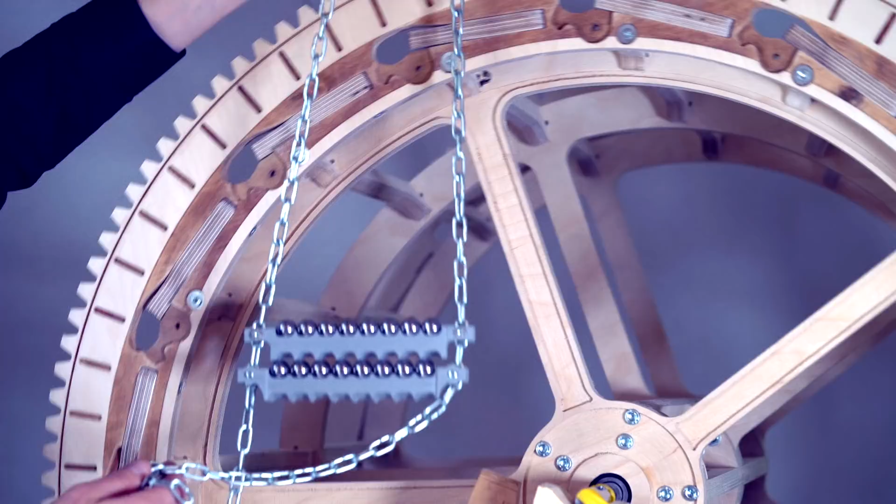This 3D printer arrived to me 48 hours ago, and I've been trying it out since then as a true beginner. Probably if you have any 3D printing experience, what you saw in the montage was material for a lot of facepalm moments, but I'm learning fast already.

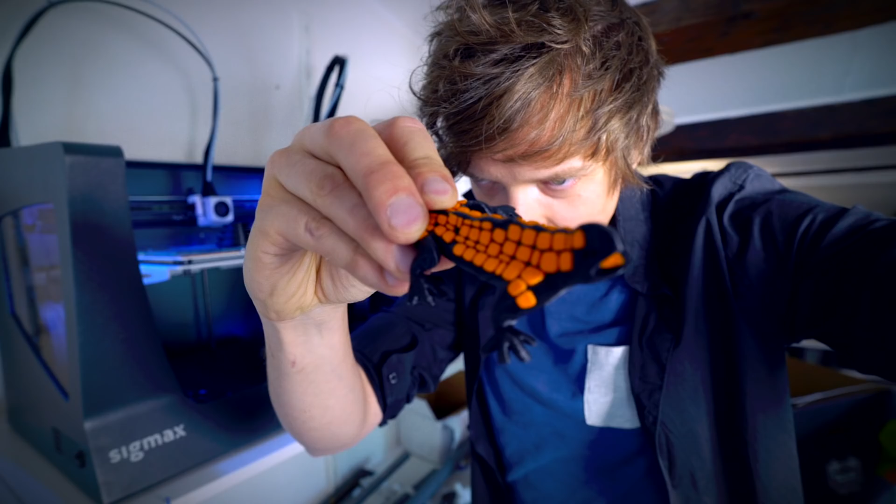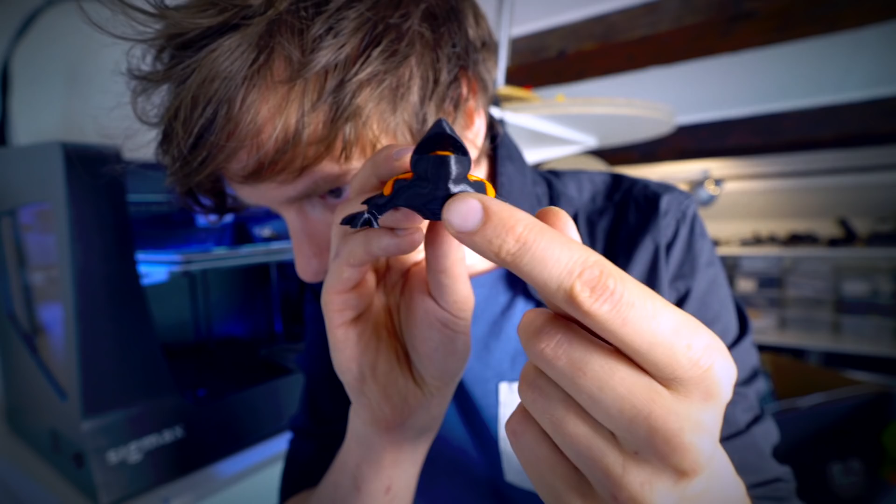It's a BCN3D Sigmax dual extruder 3D printer, which means it has two printing heads, so you can use two types of materials at the same time. Here you can see they used orange and black to print the tongue and the protection plates on its back. You can also see they printed this almost 45-degree angle without any support underneath. That's pretty neat.

So this print quality looks really good. I think a big part of getting good prints is the calibration. I did not do any calibration, and I did not check for the correct temperatures of my materials and stuff, because I didn't have time.

So this is a 0.4 nozzle that I'm going to install. What's cool is that you can have a smaller nozzle on one print head and a bigger one on the other. So then you can use the bigger one to print support structure and the smaller one to print the actual print. But if you design good, you don't need support structure.

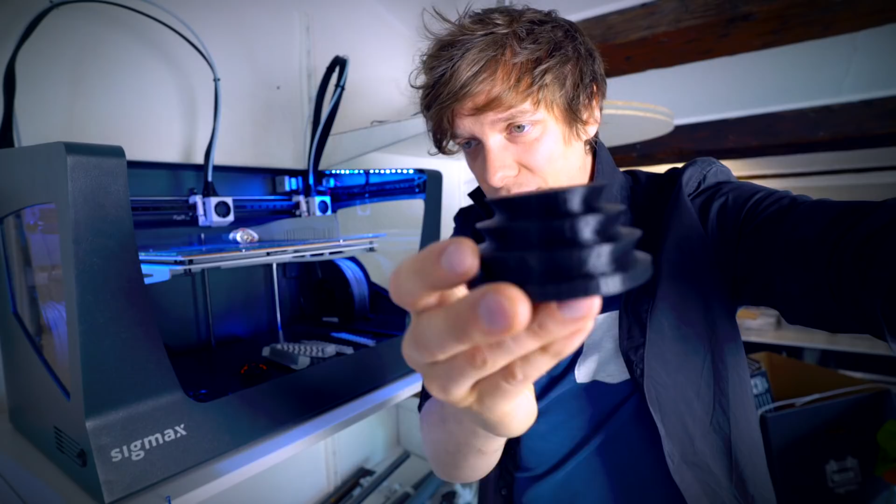For example, when Marius was here, we did this pulley, and as you can see, it's a flat piece and there was no manual work needed to be done afterwards.

So what you saw me do in the montage was a lot of manual work, and I think 3D printing is all about designing so you don't have to use supports.

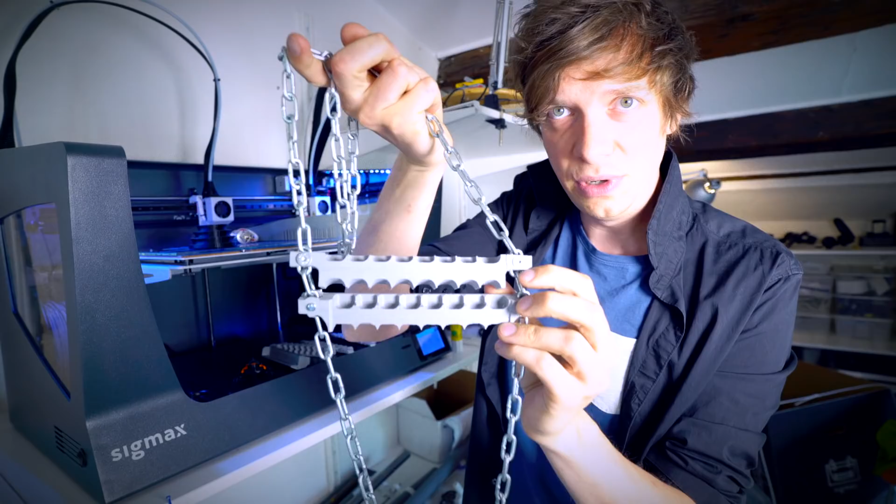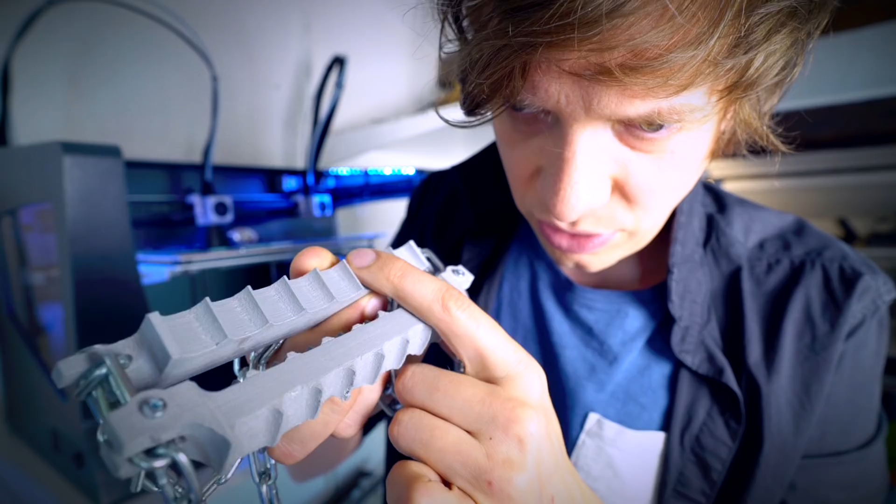I start to understand about print direction. These two parts are printed in two different directions, for example. If you check on the underside, this is the part you saw me do in the montage with support on the underside. This part is printed in another print direction, so you can see it's much cleaner.

I think a good way to print a part like this would be to split it in the middle, print two pieces and then glue them together.

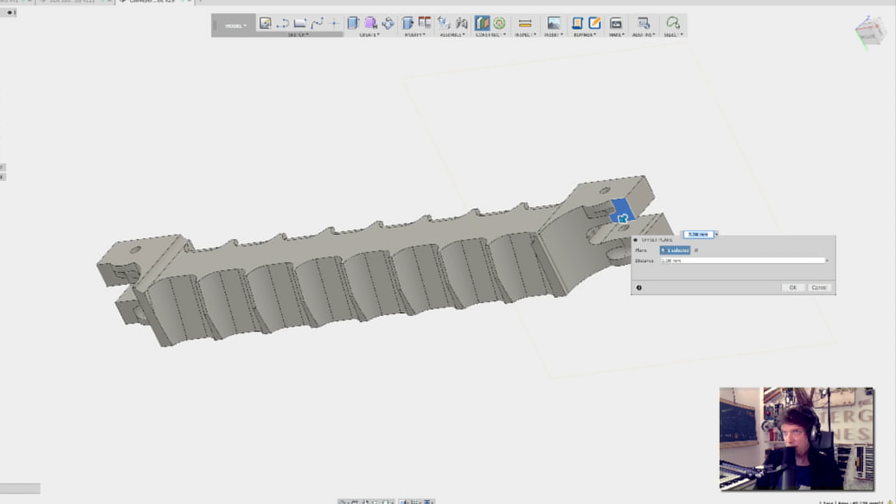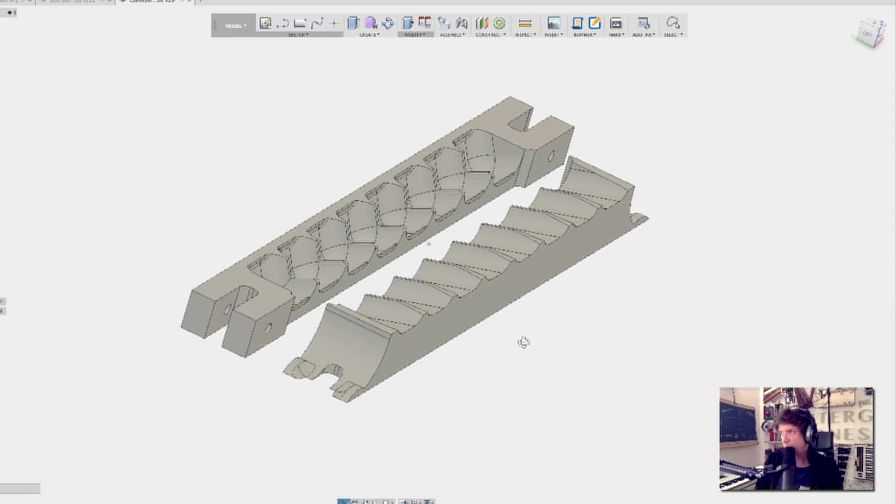Let me just show you quickly how I mean. I'm going to create a plane here, and then we're going to split this body along this plane like that. And I can take this body and drag it out like that. So this would be easier for the printer to print. This is what I mean with splitting the part and printing them lying on the print bed.

So this is the conveyor belt system right now with the ratchets on the sides, and I'm going to address some of the things that I saw in the comments from last week.

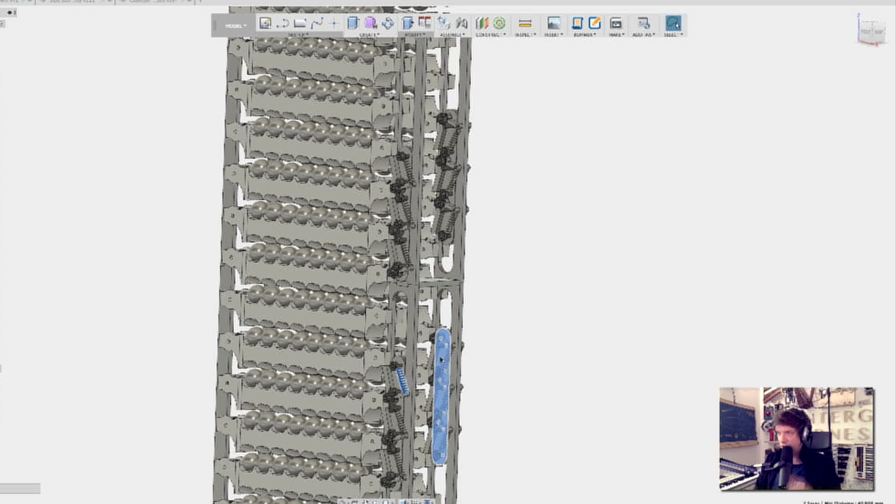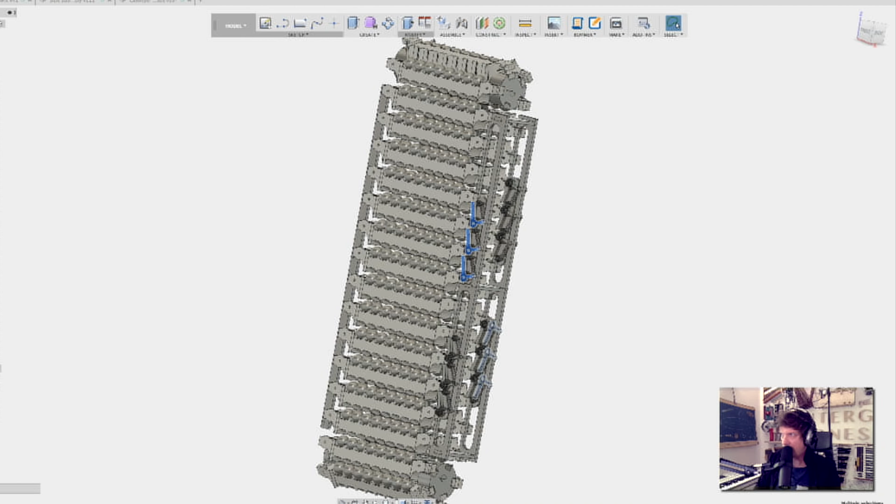The cool thing is that these two ratchets will move up and down simultaneously. These two ratchets will move in the opposite direction simultaneously. So when these ratchets on this side push up, on the other side, these will push down. There was some comments saying that I will have a problem pushing on a chain upwards. That's not really a problem here, because since we have a closed loop here, even if I push here, it will pull on the other side.

But by having this dual ratchet system to pull down on the back side and push up on the front side simultaneously, I think it will work really good. So it will be like these two work, and then for the next motion it's going to be these together with those.

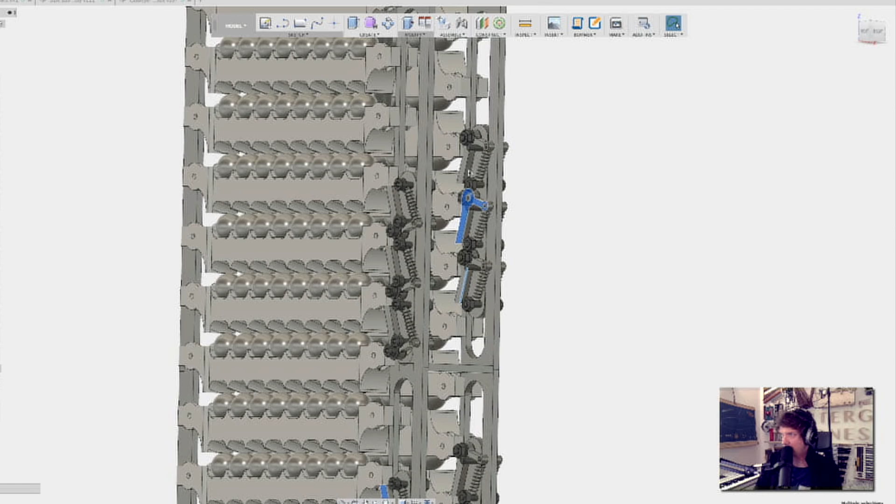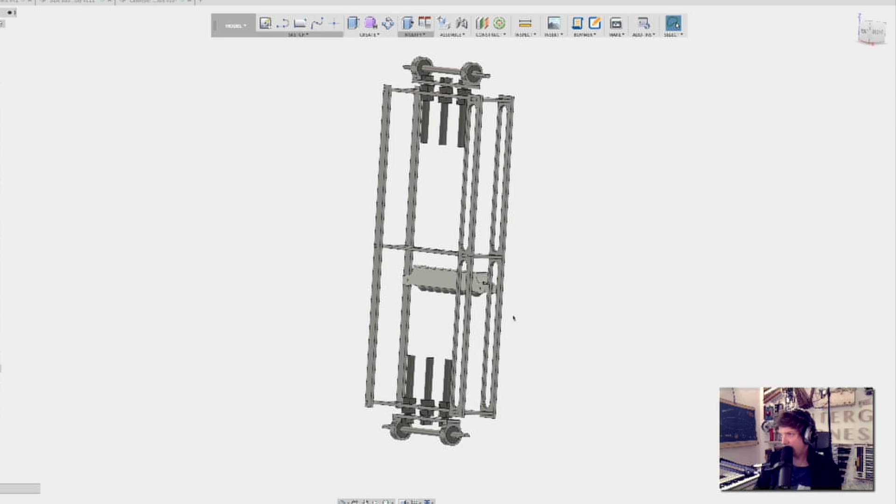A lot of people were worrying about the chain moving a lot. That's actually not really a problem, because if I isolate the frame, you can see how it's built. So this is the frame. If I put one shuttle on, you can see that the shuttles are guided. Now the marbles are hanging upside down, defying gravity.

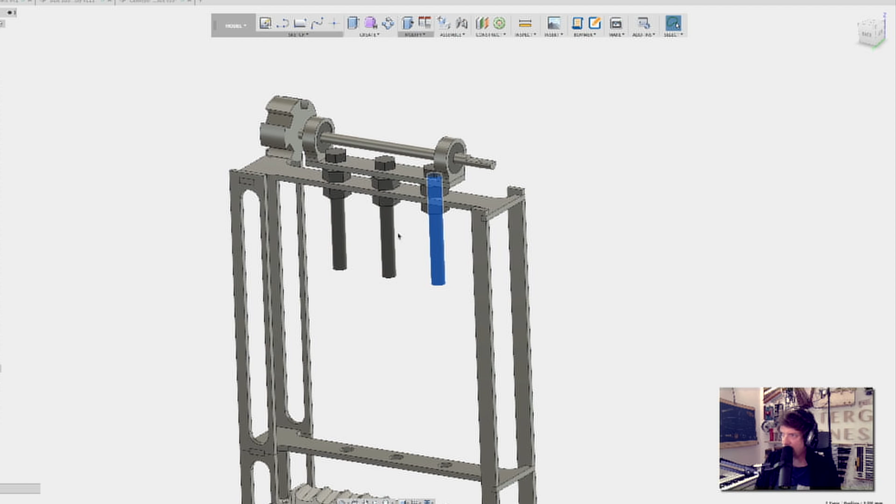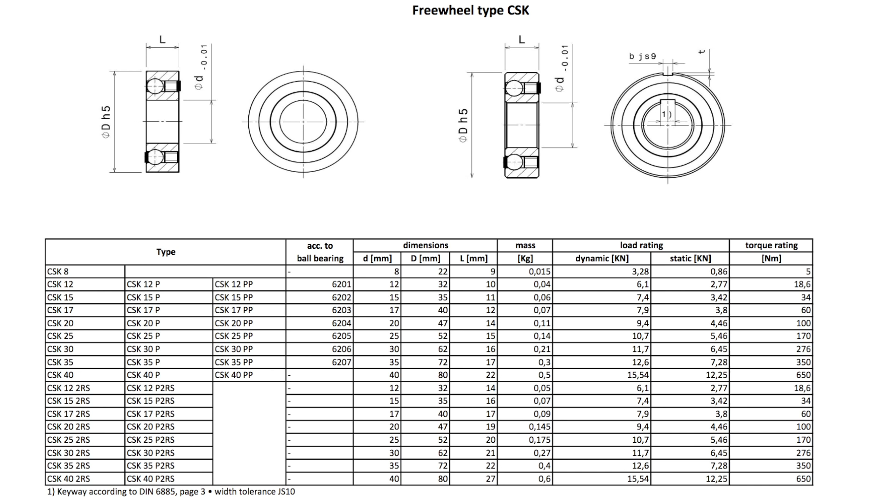By using this tensioning system, we can increase or slack the length of the loop of the chain. These bearings are CSK bearings that only move in one direction, so the belt can only go upwards, it can't slide down. I have 4 of these CSK 8 by 22 millimeter bearings in this construction.

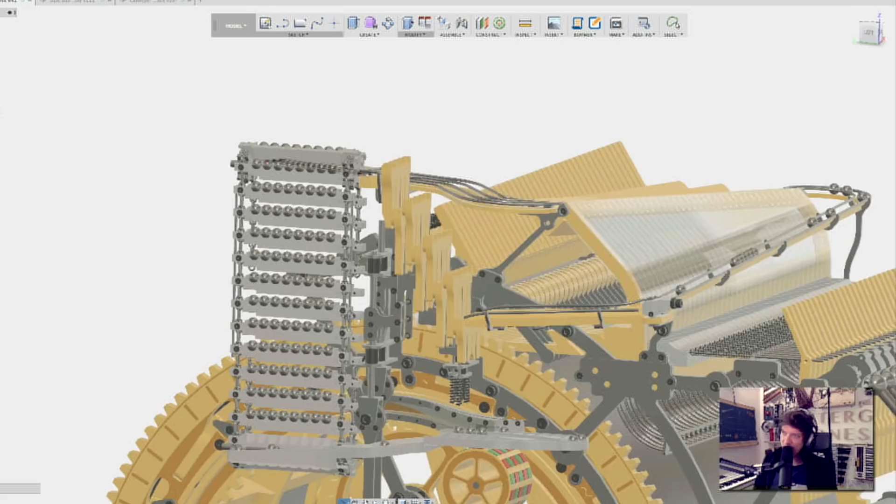Here you can see the frame on the actual machine. When I introduced this system, there was a lot of people suggesting easier solutions, and then there was one YouTube comment that really warmed my heart. This comment from Baron said, 'Doesn't pass the rule of cool though.' Like the easiest way would be to use a MIDI keyboard and just make the music.

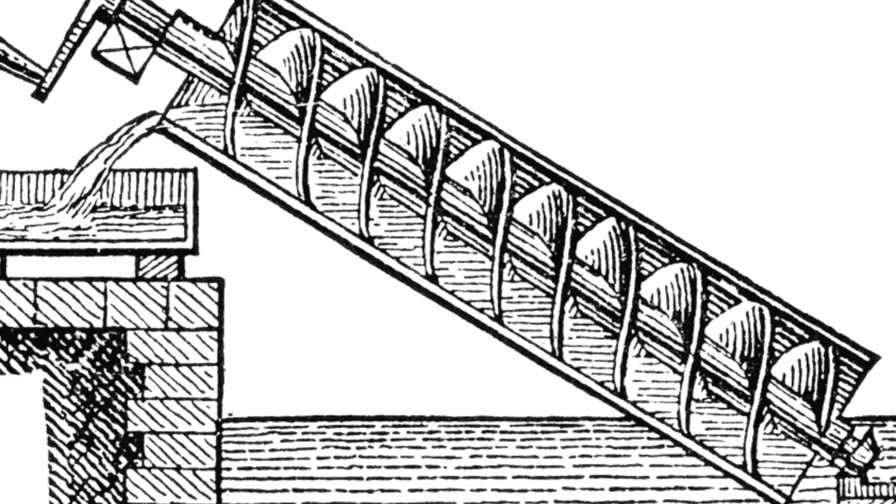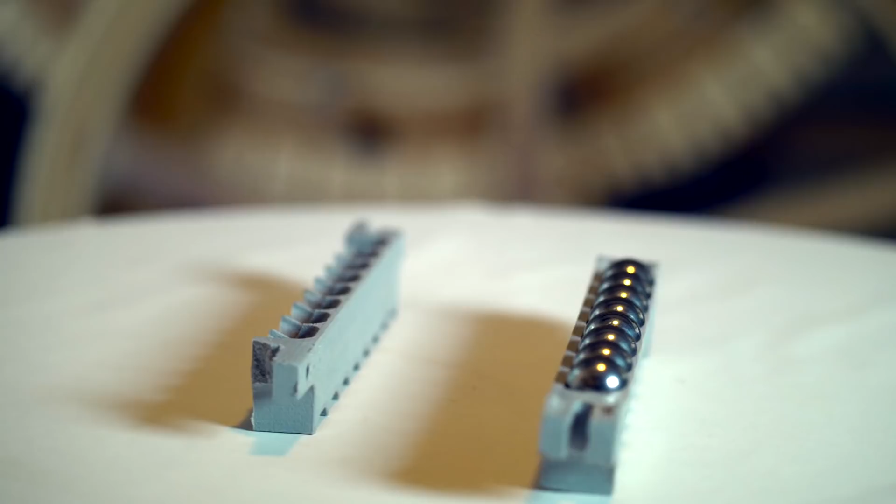One of all the simplifying ideas that I saw was to use an Archimedes screw to lift the marbles. I've seen this done in other marble machines, and it would definitely work and be really reliable, but does it pass the rule of cool? So when you think I should take a simpler solution, you should add the thought: but does it pass the rule of cool?

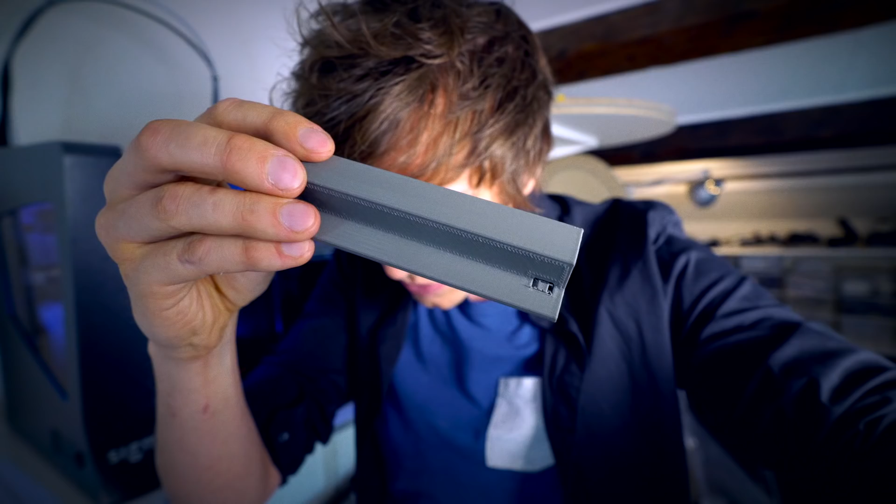This is a print from Tobias in Gothenburg, and as you can see, it's really neat. He printed this standing on the print bed on this surface and only used some support in these openings. This is the quality that I will look for when I start to do the real calibration.